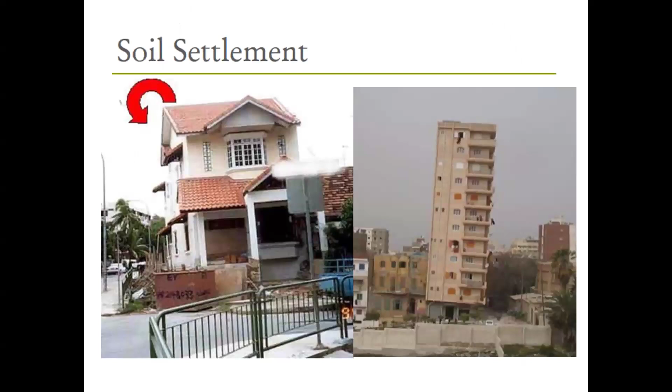And also, based on the theories, we will be discussing some good examples so that you will be having a good exposure for the exam paper. As I said, I repeat, there will be one question from this topic, so it's better if you have a thorough knowledge regarding the theories and also the worked examples, right? As I said last time, soil settlement is a major problem in civil engineering industry.

We explained the settlement can be computed in three categories. First, the immediate settlement - using the elastic theory, we can determine what's the amount of immediate settlement. Then there is primary consolidation settlement and also secondary consolidation settlement. Under the primary consolidation settlement, we can use the consolidation theory, and secondary consolidation actually depends on the creep and plastic deformation of soil.

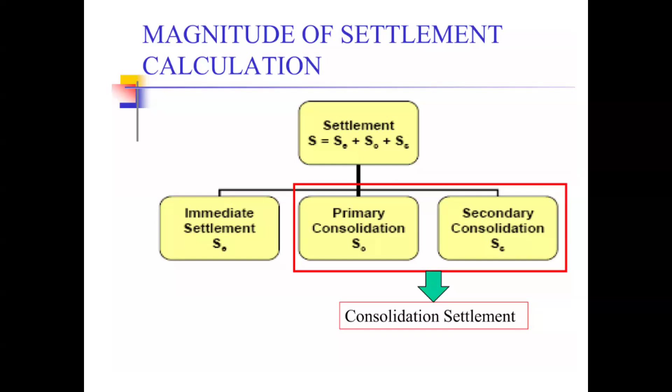So we discussed all those things, and we said in terms of settlement, primary consolidation settlement is the major concern, because if we plot the settlement versus time, you can see the immediate settlement is a comparatively low value, and it will not take much time, and the magnitude is also very limited. But when it comes to the consolidation settlement, the magnitude is also high, and it will take huge time to have the final consolidation settlement.

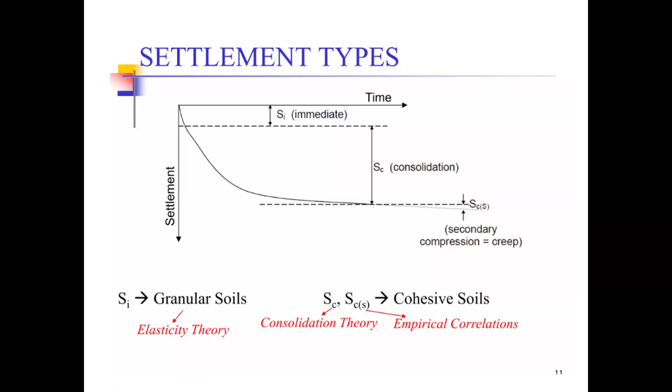So when it comes to the secondary consolidation settlement, you can see the magnitude is very much less. So when we talk about settlement, the primary consolidation settlement plays a major role in terms of the magnitude and the time. That's why we are much worried about this consolidation settlement. We have to use the consolidation theory to evaluate the magnitude and the time required for the consolidation settlement. Hope you can remember the things we discussed last time, right?

So if I move into the consolidation settlement, the consolidation settlement takes place due to the expulsion of water. As I said last time, the soil has an internal structure with soil particles, and in between the solid soil particles, there are certain voids. These voids in saturated situation are filled with water. So when we compress or apply an external load, the entire soil body will be compressed.

But when we check the soil behavior, we observe that first the additional pressure will be taken by water. As you know, if a water body is pressurized, water tries to flow away, water tries to release its additional pressure. The same theory applies here. So what happens is when you create a foundation, water will take that additional loading. But even though water takes the additional loading at first, it tries to release that pressure, right?

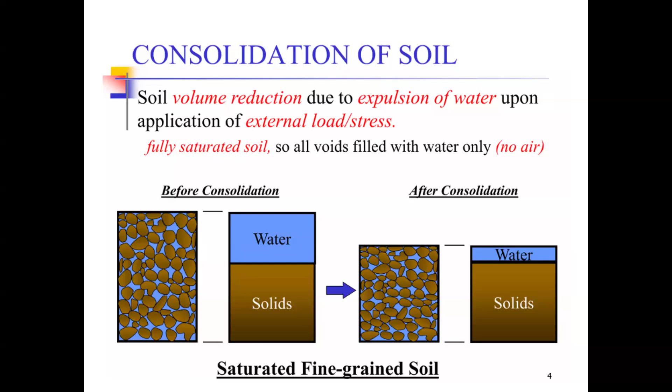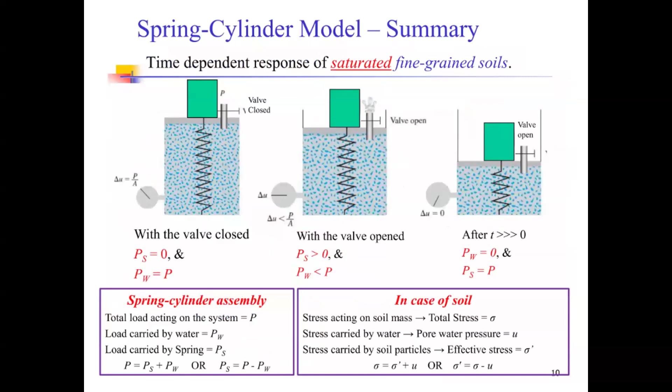Hope you understood the mechanism. We simulated this mechanism through the spring cylinder model. I am not going to discuss this again because we covered it in detail last time.

When it comes to settlement, two major things are important to understand. The first is the magnitude, the second is the rate. Magnitude means the amount of settlement - sometimes 500 millimeters, sometimes 700 millimeters. As civil engineers, once we create a certain building, we have to determine what the amount of settlement would be - that is the magnitude.

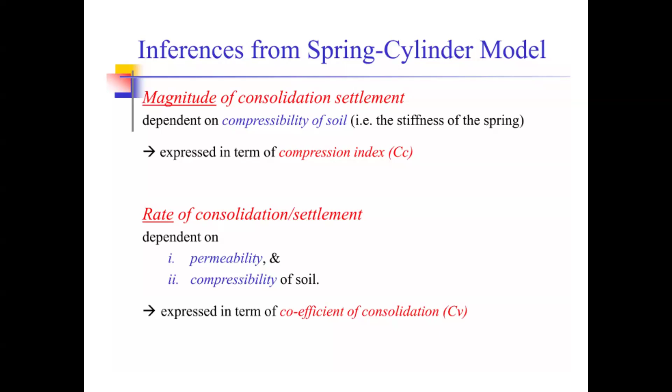The other thing we are interested in is the rate - meaning the speed, how long it will take, maybe years, maybe months. That is the speed or time duration. So two things we need to know. We discussed last time how to determine this magnitude and rate, so let me explain once again.

Let me remind you of the equation we used for the time or rate. T is the time required for a certain degree of consolidation, capital T is the time factor, H is the length of the drainage path, and CV is the coefficient of consolidation.

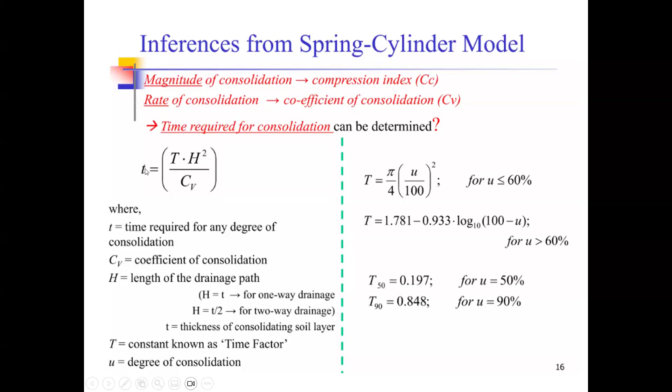The time factor is a kind of constant that can be determined using two different equations depending on the degree of consolidation you're considering. If your degree of consolidation is less than 60%, use this equation; if more than 60%, use this other equation. This lets you evaluate the time factor for your case and substitute it in. I discussed last time how to determine the drainage pathway, and CV is normally given in the question, so you can evaluate the time required for consolidation for the considered degree of consolidation.

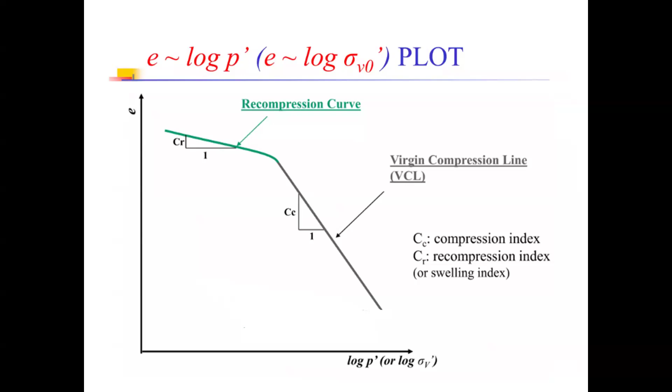Then there's the magnitude, which is determined based on the pre-consolidation pressure. Hope you remember what is defined as pre-consolidation pressure - in simple words, it is the maximum pressure the soil has experienced in its history. In its history, what is the maximum pressure - that would be the pre-consolidation pressure, denoted sigma dash P.

Depending on the pre-consolidation pressure of a given soil, we can determine whether the soil is over-consolidated or normally consolidated. We'll see some examples. Last time I explained this: if your soil is over-consolidated, you have to use CR, the recompression index, to determine the magnitude of settlement. If your stress condition is normally consolidated, you have to use CC.

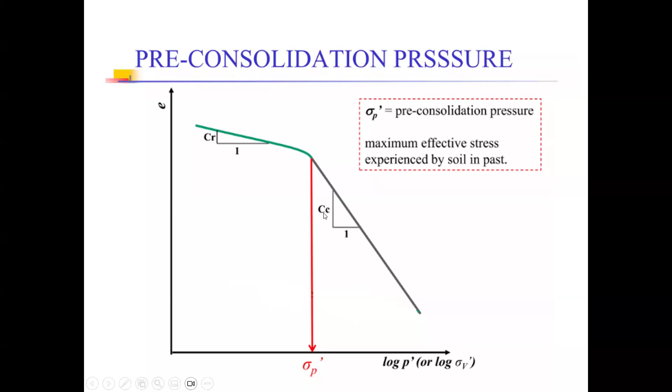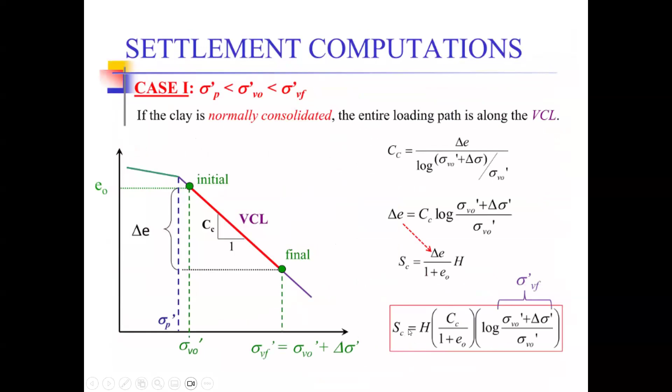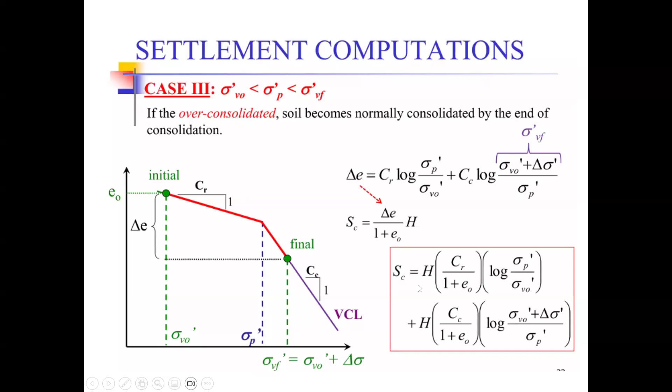So depending on the situation, there are three cases. Case one: if your soil is normally consolidated, this is how you determine the settlement magnitude. If your soil is over-consolidated, you use this equation. In case your soil is over-consolidated but becomes normally consolidated when compressed, you use this equation where the combined situation applies, so that you can determine the settlement.

So this is the summary. The time can be determined using this equation. For normally consolidated clay, settlement is computed using this equation. For over-consolidated clay, you use this equation where the combined situation applies - meaning before the foundation is constructed the soil is over-consolidated, and once loading is applied, the soil becomes normally consolidated.

That's how you evaluate the time and amount of settlement. So it's not a big issue - very simple equations are there. You just have to understand how to apply these equations.

Your exam paper question is solely based on these three or four equations. Every equation relevant to the question will be given in your exam paper, so don't worry. I will mention each and every equation required for the question, so you may refer to those equations and evaluate the answer.

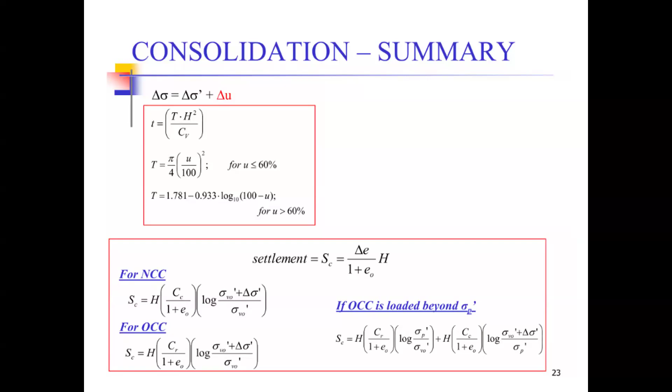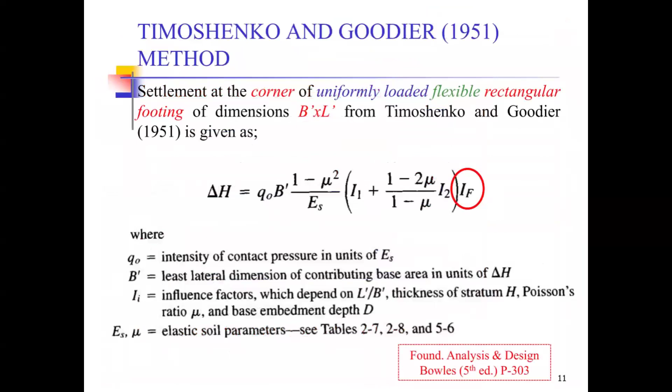Then elastic settlement - it's a kind of empirical correlation, and tables are there. You may use these equations to determine the settlement. And the secondary consolidation settlement can be determined by this.

Anyway, I didn't focus much on immediate settlement and secondary consolidation settlement. The reason is when you compare primary consolidation settlement, elastic settlement, and secondary consolidation settlement, the primary consolidation settlement plays a major role, so you should worry about that. For secondary consolidation and elastic settlement, the amount will not be that much.

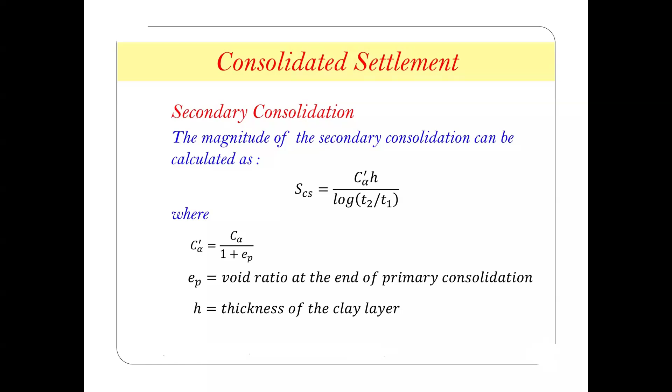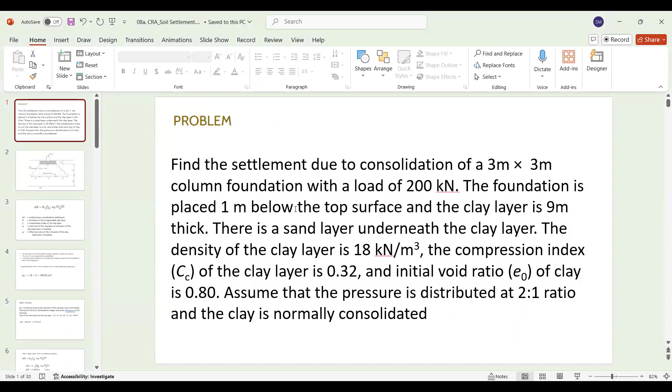So with that, we rushed over the slideshow - this is a 3 hour lecture on consolidation settlement. Anyway, I tried to give you a brief review of what we discussed last time. This is where we're going to start today - I'm going to start from this slide onwards.

We will be discussing some practical examples. I recommend you try to work these examples on your own so that you can get a certain kind of exposure before you go to the exam. I recommend you work alone on these questions and develop a better understanding - once you do it yourself, you can understand these things.

Maybe in your previous studies like HND, NCT, or whichever course you were in, you may have come across these kinds of questions like settlement, consolidation, etc. But it's better if you have a piece of paper and work on this with me, so that you can understand the theories well.

Problem number one: find the settlement due to consolidation of a 3 meter by 3 meter column foundation with a load of 200 kilonewton. The foundation is placed 1 meter below the top surface and the clay layer is 9 meters thick. There is a sand layer underneath the clay layer. The density of the clay layer is 18 kilonewton per cubic meter, the compression index CC of the clay layer is 0.32, and the initial void ratio E naught of clay is 0.80.

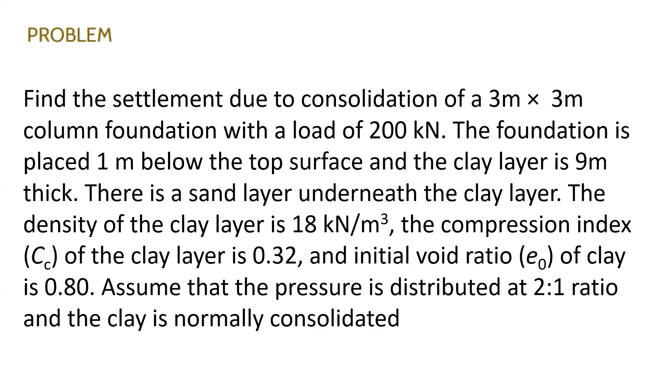So with that understanding, first what you have to do is, now this is the equation. Hope you can remember. So in the question, it is clearly mentioned that the soil is normally consolidated, right?

Soil is normally consolidated, that is clearly mentioned. So in situations where normally consolidated soil is available, this is the equation to compute the settlement of the soil. Okay, so delta H would be the total settlement.

H is the thickness of the compressible clay layer, and Cc is the compression index, E naught is the initial void ratio, P naught dash is the initial stress, and delta P would be the additional stress created by the foundation. Okay, so with that understanding, we will substitute the correct values.

So what would be the H? Here, clay layer is 9 meters thick, but the footing is placed 1 meter below the surface. So the top 1 meter is not subjected to consolidation. Why? What's the reason? You can see the stresses are applied from there onwards, right?

From the footing bottom onwards, your stresses will be generated. Meaning the top 1 meter, there will be no additional stress, no impact. Because of that, we will not consider the top 1 meter. So the layer thickness was given as totally 8 meters, right?

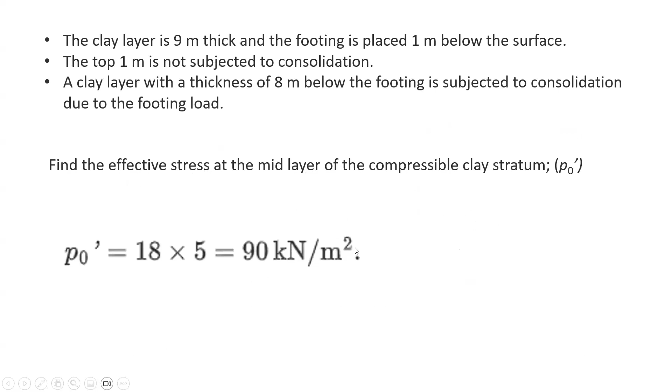As a result of the foundation, 200 kilonewton is applied here. So contact pressure would be 200 divided by 3 divided by 3. Contact area would be 3 by 3, that would be 9 square meter. 200 divided by 9 square meter will be the stress at this point.

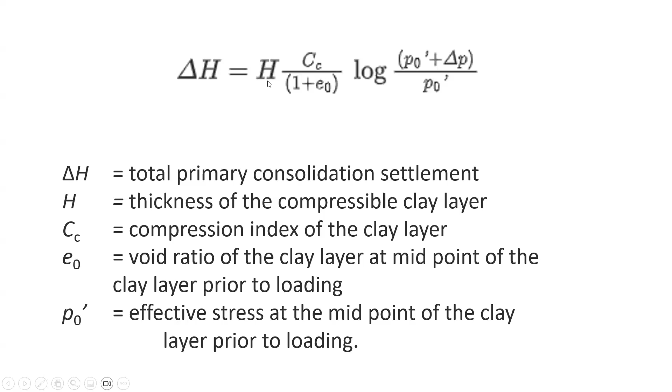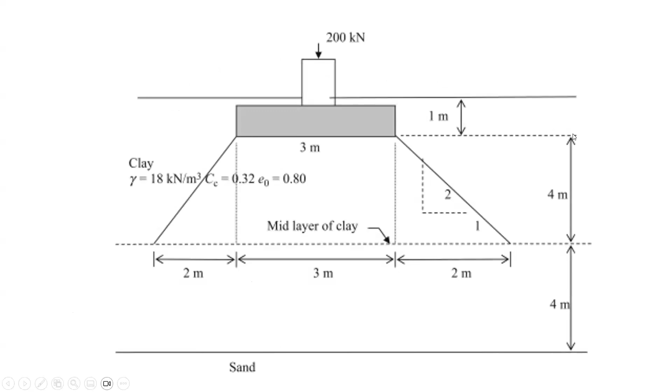Now we have to apply Cc, it is given in the question. E naught is also given in the question. H is the thickness of the clay layer for consolidation settlement, that will be 8 meters. Here, 4 plus 4, that would be the thickness of the clay layer, totally it is 8 meters. So now you can substitute the correct values here.

8 into 0.32, E naught is 0.8, P naught you calculated as 90, delta P you calculated as 4.1, P naught you calculated as 90. So finally you can have this value in meters: 0.0275, in other words, 27.5 millimeter. That would be your answer.

So hope it is clear to you, because nobody is talking to me. I hope there are no problems or confusions available with you, right? Okay, we will move to the second question.

Consider the soil profile shown in the following figure. The soil is subjected to a uniformly distributed load, delta sigma of 31.1 kilonewton per square meter, on the ground surface. The sand is such that gamma D equals 16.5 kilonewton per cubic meter, and gamma saturated sand is 19.3 kilonewton per cubic meter. Underlying clay, gamma saturated clay equals 20.5, and liquid limit is 38. E naught is 0.89, and Cs equals 0.25 Cc. Depths H1, H2 and H3 are as shown. Determine the primary consolidation displacement of the normally consolidated clay layer.

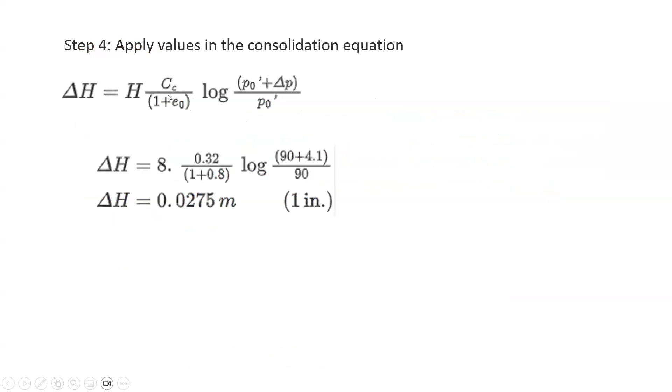So let me explain this example. In situ overburden pressure - first you have to evaluate using this equation. First you evaluate the initial stress, then the additional stress, and then you have to evaluate CC and E naught. So now let's see.

First you are evaluating the effective stress at the mid depth of the clay layer. So here first you have dry sand. In the dry sand, the gamma value is given as 16.5 kilonewton per cubic meter. Then we have gamma sat sand, meaning saturated sand below. Here dry sand is available, here saturated sand is available.

In the dry sand you have to apply gamma dry. In the saturated sand you have to apply gamma sat of the sand. Every value is given in the question: 16.5 here, 19.3 here, and also the underlying clay, gamma sat of clay has been given as 20.5. So with these values we will calculate the initial overburden soil pressure.

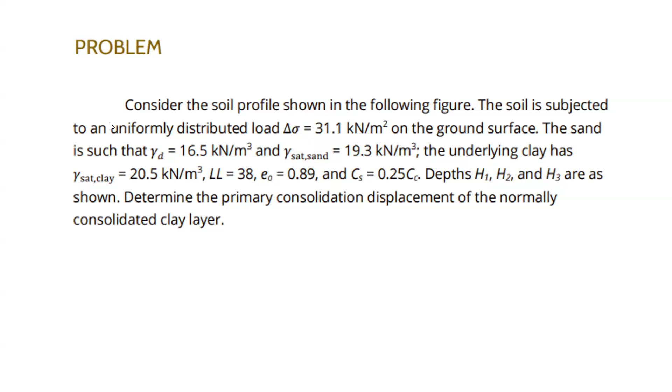Compression index - here liquid limit is given as 38. If liquid limit is given as 38, you have an equation you can use to evaluate the CC value: 0.009 times liquid limit minus 10. So that's how you evaluate the CC value.

So you apply that evaluated value here. E naught is given in the question as 0.89. Now it's just a matter of correct substitution of correct values. CC value you evaluated as 0.252. Just substitute here - H, the height of the clay layer to be consolidated, is 4 meters. And then 1 plus E naught is 0.89, log 10, 82.9.

Now, in the above soil problem, given the coefficient of consolidation CV as 0.24 centimeter square per second, how long will it take for 75% consolidation to be over in the field? What's the time required? First, your equation would be this one.

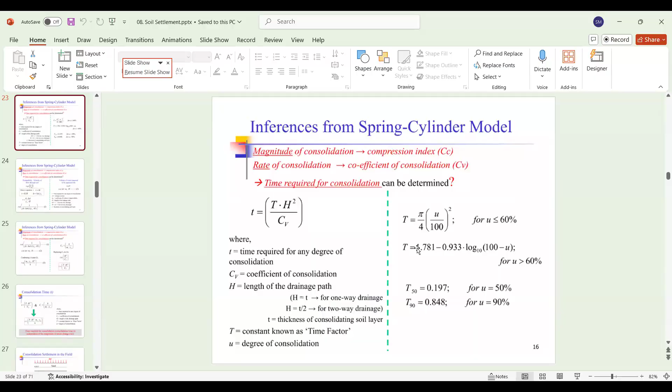In case the degree of consolidation is 60% or less than 60%, you have to use this equation. In case the degree of consolidation is more than 60%, you have to use this equation. So now in our question, our consolidation is 75%, so that's the reason we use this equation - the log equation - and that's the reason why.

So now here, we apply our degree of consolidation given in the question, 75%. That's why we apply this equation for 75, which is calculated as 0.477. That's why here we applied the same value. Now one more thing: CV is also given in the question, no issue, you can refer to the question and have that value, it's there.

Okay, the only problem is H. Now I want to test your knowledge about this H. Here H is not the thickness. H is the length of the drainage path.

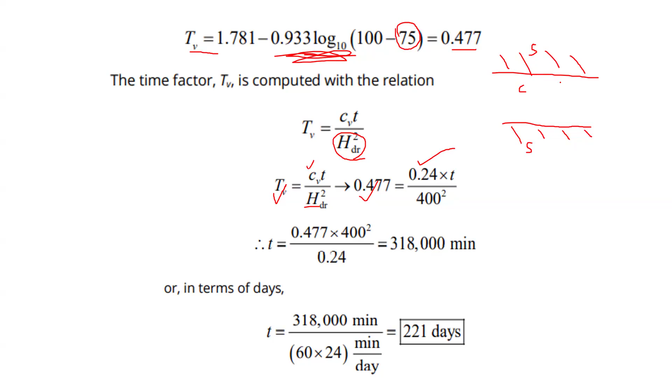Length of the drainage path. The definition is the shortest length, or I may say the longest perpendicular length, that a water droplet must run to release its additional pressure. That is what we call the drainage pathway.

So in this situation, let's say your top layer is sand and the bottom layer is also sand. This is like a sandwich layer, right? So in a sandwich layer, what would be the drainage pathway length? I said the longest run of a water droplet in a perpendicular pathway to release its pressure, so that would be here, no?

Now water here can run perpendicular, it can go like this. Water tries to escape, no? Water will not go from here, water definitely finds its shortest pathway. So a water droplet here will go this side, and a water droplet here will go downside.

So what would be the maximum length then? A water droplet at the center has to run from here or the other direction, whichever direction it can transfer - both ways it can go through. So what would be the drainage pathway length, capital H, here? That would be the thickness of the clay layer divided by 2. Understood? Thickness of the clay layer divided by 2.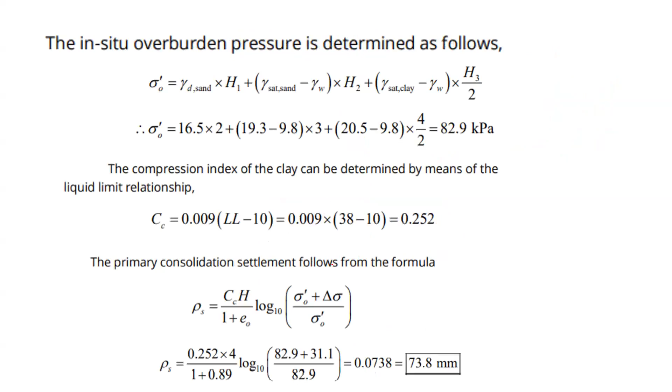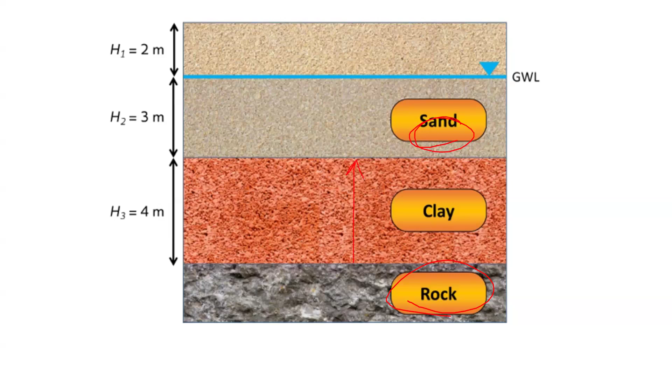So here, what happened? Now H should be substituted here. How about this H value? You can see here we have a rock layer, here we have a sand layer, so it is like a singly drained situation. So the full depth is what the water droplet has to pass through to release its pressure, right? So that's why we have to apply 400 here as the drainage pathway.

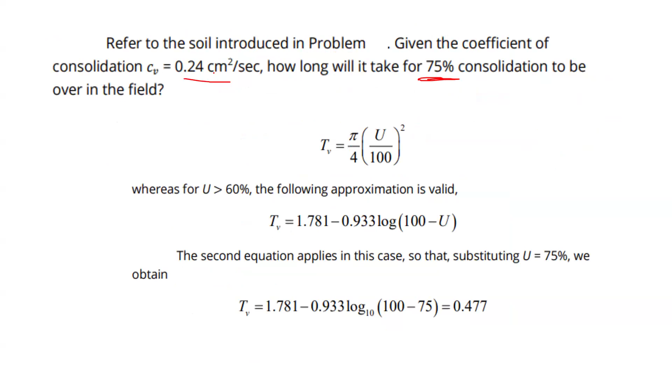So now it is clear to you, Madhushani. You are the only person available today, right? Okay. Shall we continue, Madhushani? I can share the presentation with you to refer to. If you want my clarification, I can continue the session since only you are available. If you want to continue, I can continue, no issue. If not, we will wind up the session and have one tomorrow, we will be having a lecture tomorrow as well. Since you are the only one available, if you're okay, I can continue; if not, we can wind up and I'll share the presentation so you can refer to it and get some understanding. It's up to you, Madhushani.

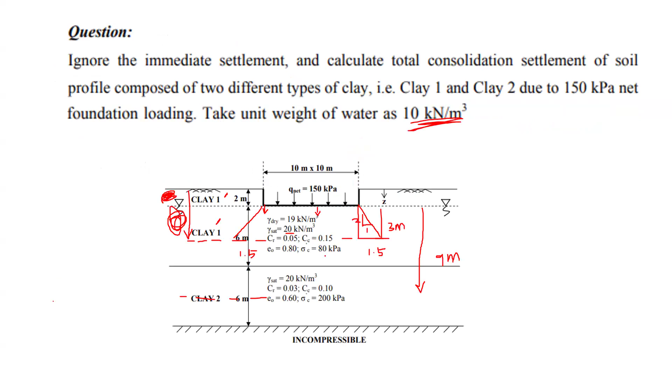Now what's the problem here? You can see sigma dash c is 80 kilopascal. Now what is the initial stress? 68. Remember the graph, it will look somewhat like this — here is the pre-consolidation pressure, given in the question as 80, so this point equals 80. In our initial stage, the stress is 68, somewhere here. Due to the foundation, the loading will increase by 88.8 kilopascal, so the final pressure would be 156.8, somewhere here.

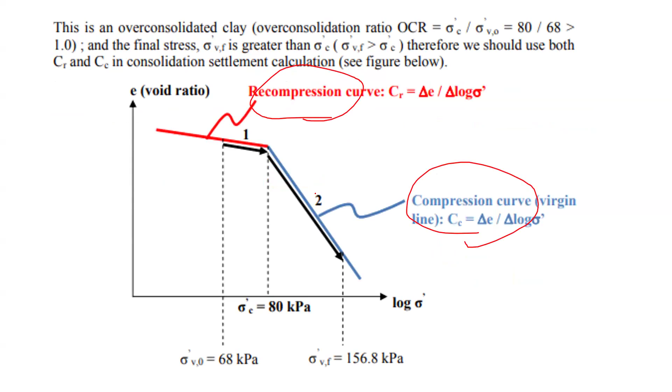You can see both the over-consolidation situation and the normal consolidation situation are applicable for clay layer 1. That's why here it is present — the recompression curve and the compression curve are both available for situations 1 and 2, so we have to use both in this equation. In this first situation, this will be the recompression index, CR, given in the question as 0.05.

The initial void ratio and the thickness of the clay layer, which is 6 meters. Here this would be the initial stress, and this would be the final stress. Under the over-consolidation situation, on this over-consolidation branch, the final stress would be 80, that's why 80 is applied here. This one is the initial condition, which is 68. How about this situation? This is 156.

6.8. So in this situation, here again, you have compression index. It is given in the question as 0.15.

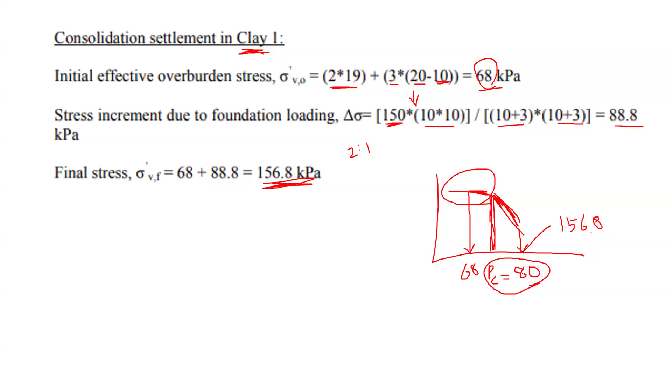And this is the initial stress of the normally consolidated situation. So initial stress of the normally consolidation situation is PC. This is where the normally consolidation take place, begins. So here it will be 80. The final stress would be 156.8, that's why here 156.8, here 80. Hope it is clear to you.

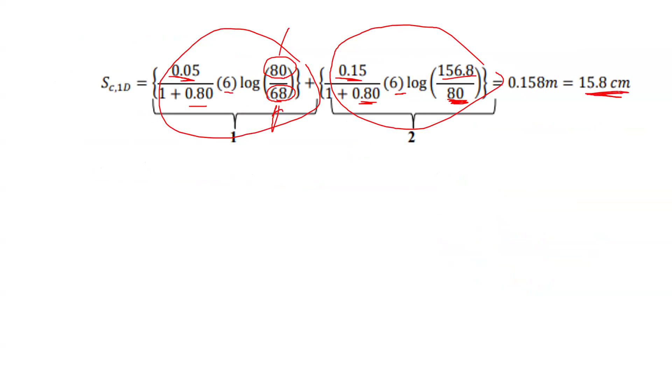So total settlement would be 15.8 centimeter, right? Similarly, you can check for clay number 2. First, you have to go for the initial effective overburden stress. It has been calculated as 128.

Stress distribution has been coming as 41.6. Now, the final stress is given as this. So, if you see this condition for clay number 2, what happened?

Pre-consolidation pressure for clay number 2 is 200.

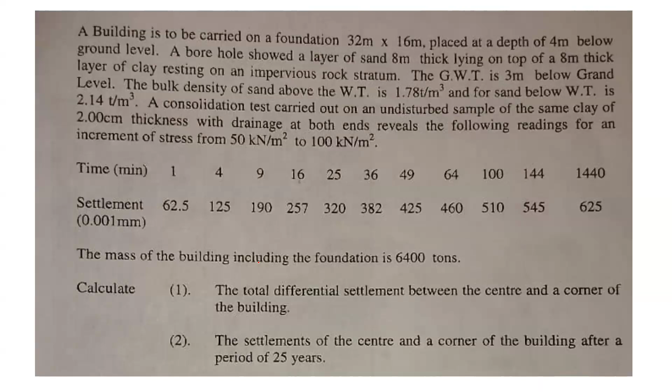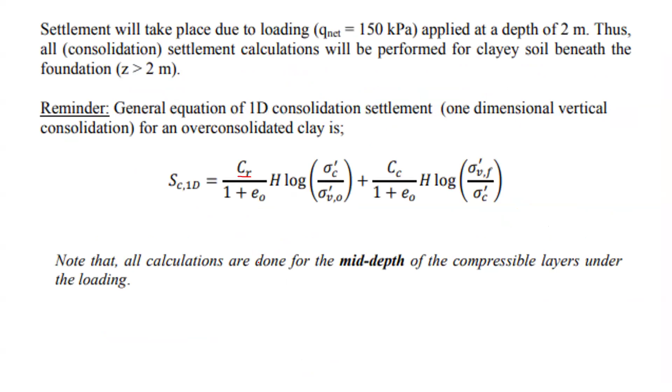I will not say which stage the clay is, whether it is normally consolidated, I will not say in the question. So you will have to determine whether this clay is over consolidated or normally consolidated. Depending on that, develop your theories, and then evaluate the final settlement. That's what is expected from your exam paper, right?